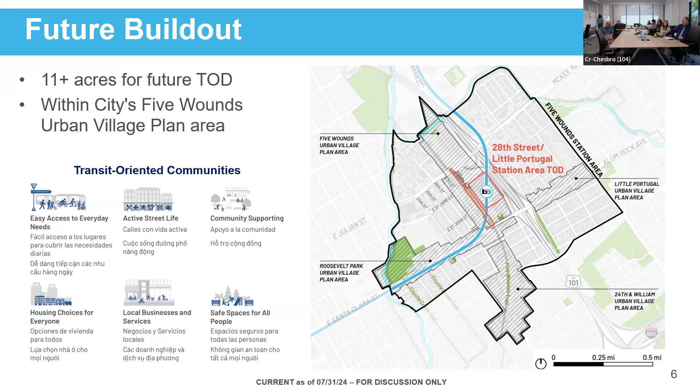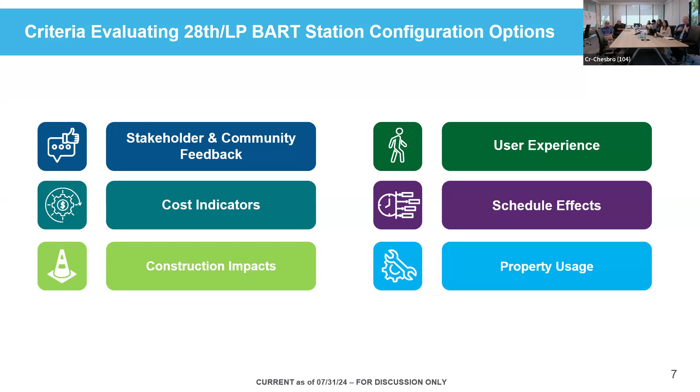So we'll get into some details. These are the things we talked about last week, things we were kind of using to evaluate our options here. These are things we got feedback from the community working group on. Thank you guys for taking the polls, I know those sometimes didn't quite work perfectly with the phone configurations, so we sent them out again. Hopefully you guys have the link, and if you take that again, hopefully we'll get more feedback utilizing the ones sent out in the link to today's meeting.

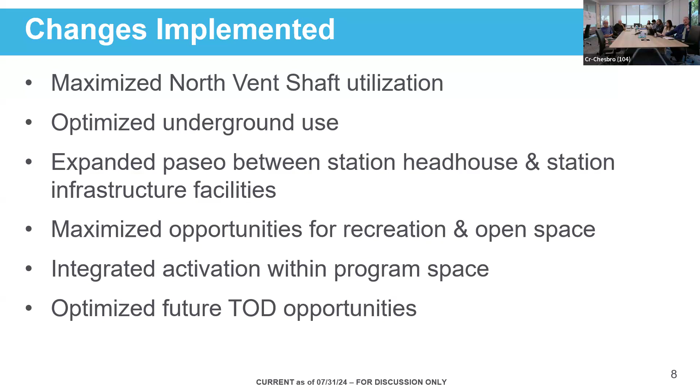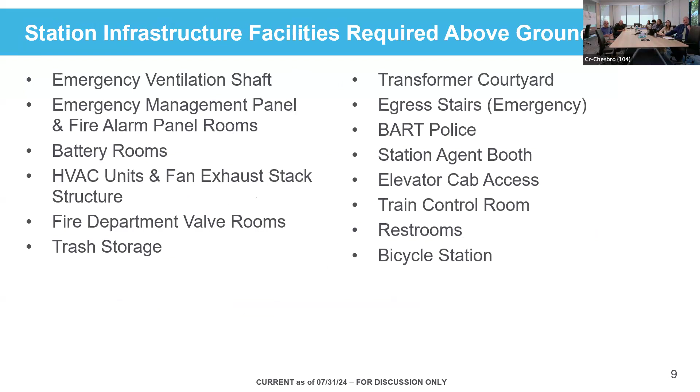And then also looked at optimizing the TOD opportunities around the station. So those are real things that we've done. I've also covered this - these are things that we have to have above grade for the most part. So we don't need to go into all those in detail.

But I just want to show you there are some square footages that we do have to accommodate. So we do still have the 4 options that we want to get more feedback on today, and I'll present those in a little more detail. We've got our underground option, the integrated above and underground, our consolidated, and then the above ground.

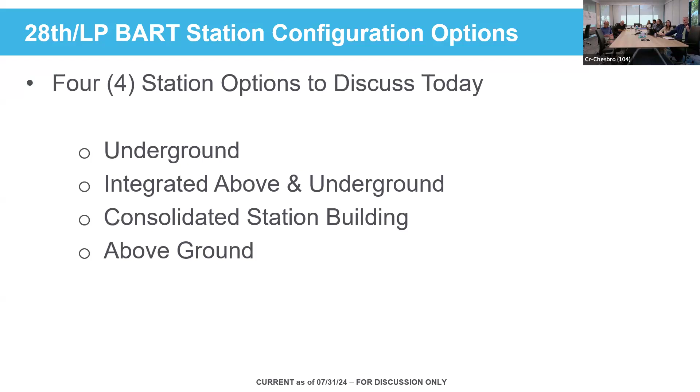These are kind of what the 4 options look like based on the future condition build out. I'll leave it here for a minute so you guys can see what we're talking about. I think there was a comment asking about massing and how large these things are going to look in the future. So these 4 slides show where the church is, where the high school is, where the station plaza will be in orange, some of the neighborhood park across the street that Charlotte mentioned earlier, and then these 4 station options shown really in blue.

Those are the real configurational updates that we wanted to talk about, just the areas in blue. David, you mentioned we should have a bigger picture of the whole area - we'll definitely have that for next week's community meeting. But today we really want to focus on these quadrants.

I will say that those TOD black and white buildings are definitely just concepts at this point. We are not here to talk about what those shapes of those buildings will be, or what.

Sorry, I think we're battling mice.

Yes, okay. So we're not here to talk about what these shapes will be. I don't know what they'll be, but it really comes down to what the footprint will look like. So those are kind of 4 options.

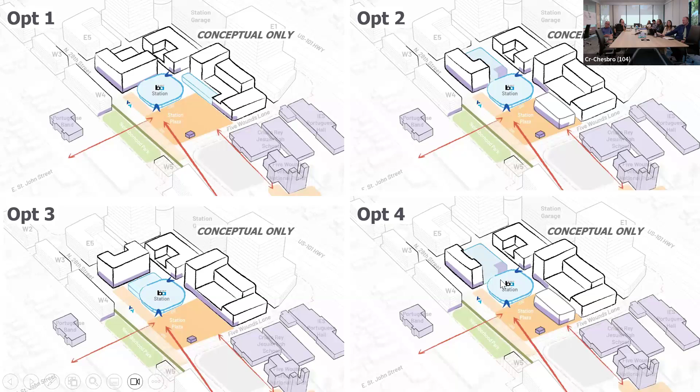Again, the area under evaluation is just where we're talking about for the future TOD site and the station head house that's shown in blue. This is the underground option - you might want to say TOD is transit-oriented development. Thank you, yes, that is transit-oriented development. So that will be ground floor, commercially leasable space.

That could be anything from businesses, retail, food services, or other institutions that could take part in that. It doesn't necessarily have to be something that somebody's selling. And then above that would be mixed use. So that could be housing, it could be office space, and it really depends on how the whole build out will look. So when we say future TOD zones, that's really a wide variety of open space that could happen there.

So this is the first concept we talked about. We added some dimensions to it. We do kind of show where that paseo would be between the two. And then we show that this infrastructure facility is kind of cutting the corner of the plaza out a little bit here. And then we would need to roll back the TOD footprint a little bit in this northeast quadrant. And then we have a pretty large, massive underground facility here.

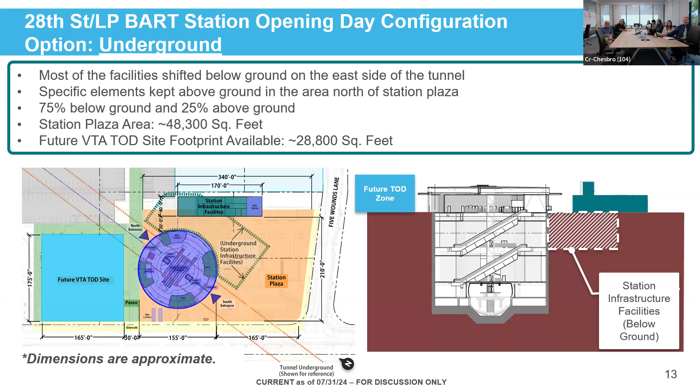The next option, or this just gives you a little bit more detail of that particular option in terms of square footages, offsets, kind of how that site looks. Again, this orange plaza is about an acre. We tried to widen this paseo out. We've got our 28th Street bus stops over in this area. And we've got our future TOD site, and this could be surrounded by a multitude of different things.

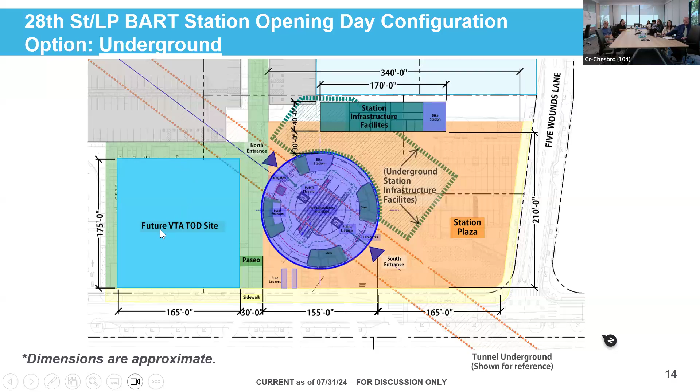And here's a close-up view of that underground option. This would be the future build out, not opening day. So opening day, I think we talked a little bit about that before. That includes the parking lots, that includes the parking garages, but does not have these buildings in white and black.

Okay, so this is the second option. As Erica just mentioned, this is kind of what opening day would be. We've got some surface parking and parking garage. We got a north vent shaft facility over here to the left, and then we've got our facilities here. What this one does is...

combines a lot of above grade facilities with a below grade facility that directly connects to our head house here. You can see it in this hatch where we've got a lot of below grade facilities right adjacent to the head house. This is a pretty efficient design in that we've got a lot of facilities that come out of this head house and tie directly into the station's infrastructure facility. We utilize being below the paseo here, kind of optimize that configuration. And then we allow for about a 90-foot setback here for a future TOD site.

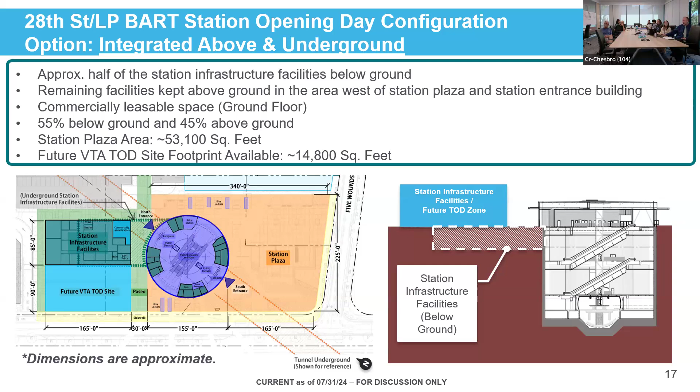Again, here's a little bit more detail of that. This does provide for a pretty large footprint of underground facilities that really run directly from the head house into our infrastructure facility, which is the most feasible in terms of all those cables and wires and mechanical vent structures and things that we've talked about before, that we have to link these two pieces of infrastructure together.

I also note that we've got a pretty large available space for ground floor activation here in this corner. We can reconfigure this in a few different ways. But if you can see that, I don't know if you can point to that. Yeah, right about there. So this probably wraps that whole block, maybe more than 50% or so of ground floor activation by utilizing that corner right there as well.

So I just want to note that is integrated into this program as well, into option 2, or the integrated option. And this is kind of how that future build out would look. Again, the purple spaces here are kind of ground floor activation. We've got our above grade facility.

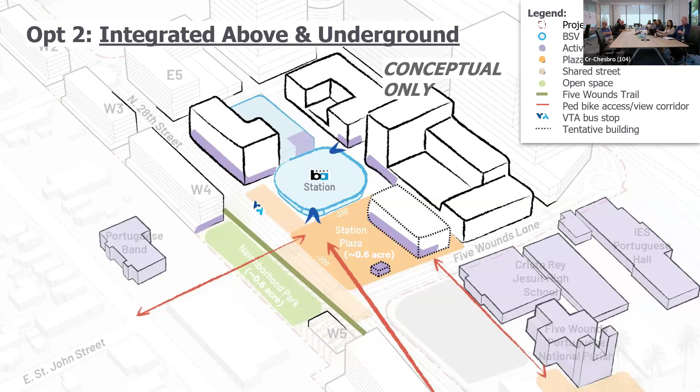This is not something that we need to talk about today or decide on today, but what the project will do is not have a lot of infrastructure in that particular area surrounding that building, so that it could be built out in the future. So I just want to take note for some of you who might see that this little hatched building is a little different here. I do want to note that this plaza is 1 acre. If it just becomes too big and it's underutilized, we're able to maybe talk about putting in another facility here, and that would be way beyond day 1.

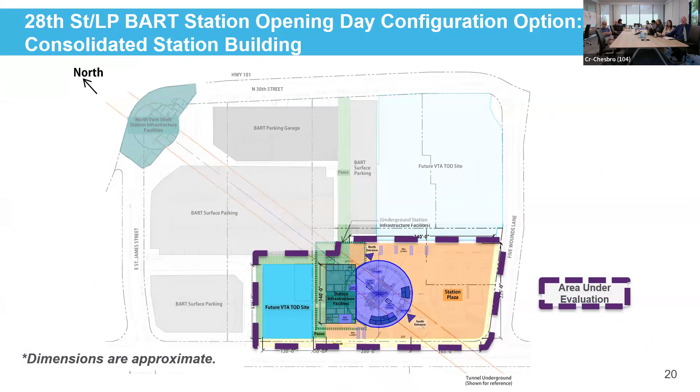Okay, and then the third option, and I mentioned we showed this one last time, and it was a little less clear, and I wanted to make sure it's a little clear to everybody. This one brings the infrastructure facility close to the station and kind of almost overlaps it. I don't know exactly if this is what it would exactly look like. This is just a concept. We'd probably make this a little bit different shaped. But what this does is it integrates those station infrastructure building facilities and the station head house together.

The drawback with this is it may impact the openness of the station itself. So that's one thing to think about. Although we do bring the infrastructure facility back closer to the head house, which is really where it wants to be, we do probably impact maybe a portion of the station, making it a little bit more closed off. In terms of station design, the station architects really like the open concept, and this one closes it off a little bit. So that's one thing to consider.

But it does have the underground facility right adjacent to the purple head house. As much as about 70% of that infrastructure is below, and then we have some elements above. We would also have a paseo, again about a 30-foot offset to a paseo, that would also utilize underground infrastructure below that. And then we would have a future TOD build-out site to the left of that.

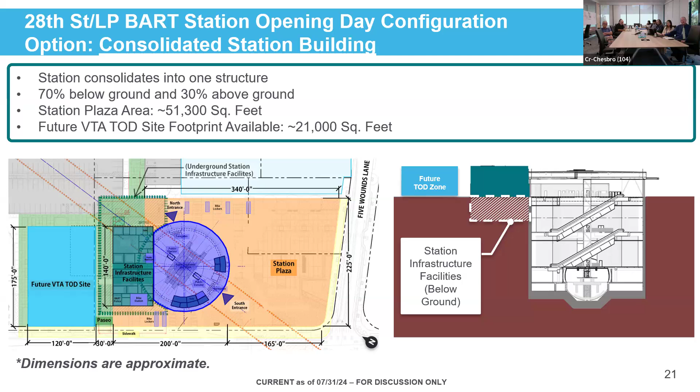So hopefully everybody gets a concept, that third concept. And then the last concept, well, this is another close-up view of that. This one also does not have any integrated station infrastructure commercial space. So there's one thing that we were not able to accommodate when we get things as tight as possible. We lose a little station space, and we lose the ability to build out some commercial leasable space on day one.

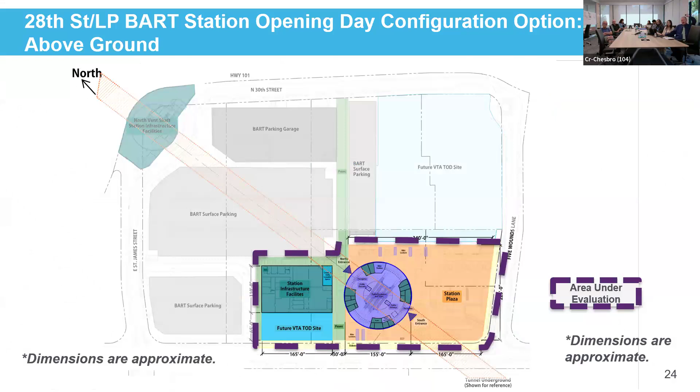Okay, and then the last option is the option that we originally presented several months ago. This has just about everything above grade. It is the least expensive option in terms of build out and construction costs. We do have commercial space in the corner over here. We've got our TOD build out in this area, and then a fairly large wide open station configuration as well. This is the same station configuration that's shown in option one and option two as well.

So those are the main things that I wanted to present to the group today. Hopefully that helps kind of alleviate some of the questions folks may have had in terms of overall site build out, rough order of magnitude on dimensions and things like that.

I do want to get into the details a little bit. The underground option is a little bit more expensive than the other two options presented. Again, it has just about 75% of the infrastructure facilities below grade. The other ones are about 55, 45. You can kind of work your way through those.

The station plaza area remains a little bit over an acre, about 48,000 square feet. So we're right about at an acre, sometimes a little bit more. Then we talk about the integrated commercially leasable space - some have it, some don't. And then the future TOD is roughly the same for the three options, and the above grade portion gets a little bit smaller.

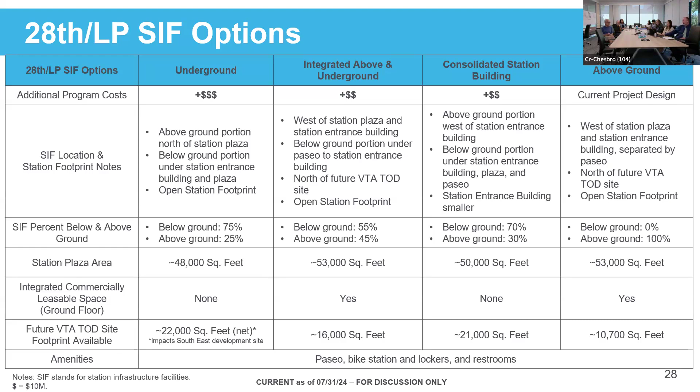So the question is how many commercially available spaces will there be? It really depends on which option we go with. On the day one scenario, depending on which option we go with - I'll just look at the option that has commercially available space on day one, which is this one. We really have one space here. And then we would potentially have some spaces out in the plaza, which would be like kiosk-style spaces. But those wouldn't necessarily be there day one - they may or may not be there day one.

I know that in Milpitas, and I haven't been there since before it opened, but there was supposed to be a space for food trucks.

Yeah, so a way to maybe test the viability of kiosks might be to allow for select approved food trucks, so we don't have a food truck fair.

Yeah, and we've kind of thought about that, and this northern or eastern portion of the site could be used for food truck entrance and exits, and we would be able to accommodate that in a few different areas. So that's definitely something we could consider.

Right, and then also, in Milpitas, sometimes it's very difficult to actually lease these spaces out. In terms of a food truck or a temporary kiosk, it's a lot of times easier than having a full build out like this is.

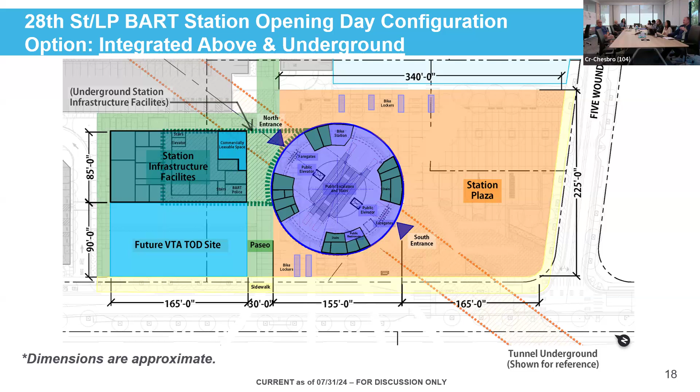So what are the heights? For instance, on the future TOD site, what's the height on that dashed building? Right now they could vary anywhere between 3 and 6 floors, Christina - all these buildings kind of have multiple different floor scenarios depending on what square footage you guys need. Is that right? Yeah, and it's a concept that's distributed across the whole entire 11 acres.

That's been going on through the design development framework process, where the goal, taking a bunch of different considerations of the overall site, is that the heights are lower near the church and school and higher towards the freeway and the farther side of the site on the north side. If you can see the background here, this far building concept is maybe 10 stories tall. This E5 here looks like about 5 or 6 stories, and these are shorter - that could be the residential units. So that's the way this thing would be configured, and as Christina mentioned, they get shorter as we get closer to the station.

I just wanted to add on to what Greg was talking about earlier. For the future TOD build out, the goal is that VTA's TOD real estate group will have a simultaneous RFP process as the station is starting to come live. So as soon as we're able to get site control back from the contractor, we can put out an RFP for either a single developer or several developers who would build out the site. With the aim that once there is site control, they would already be doing community outreach, design development or design proposals, and be able to start taking action as soon as VTA gets site control back.

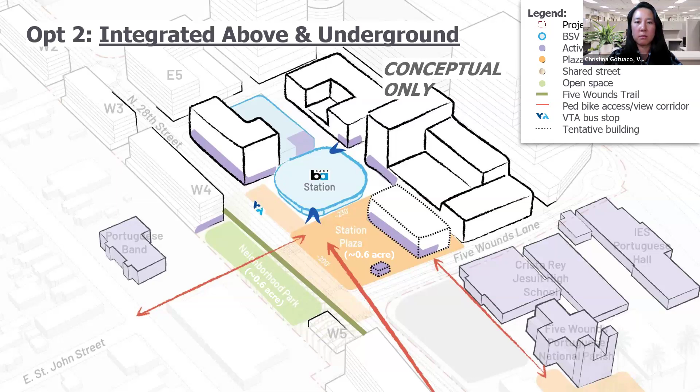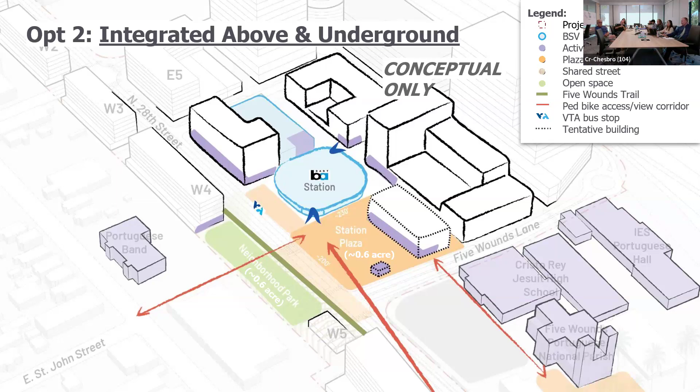Can I ask another question? Of course. The brown, or tan, on the images—what is that? Is that stone, is that concrete, or what? I'm sorry, the design review committee is doing those kinds of considerations.

Okay, I know that, but that's why I brought this forward—because whatever that is, if food trucks or any vehicles are going to be parking on there, they leak, so we need to require owners to diaper their vehicles. Well, we're not going to— it depends. Correct, it was a joke, Dan.

If you can see the background here, there's a lot of different site features—furniture, plaza features, trees—and there's a paving scenario that runs from the corner here into this area, with some decorative paving and all this business. So there's a lot of other details we'll be working out through the design review committee. Right, I'm just throwing it out there.

I don't know if there's talk of maybe having an area here for food trucks, but I don't think a food truck's going to be out here in the middle of the plaza, right? Oh, you'd be surprised what they do on their own around here. Well, we do have a BART police facility directly here, and there won't be people driving out on it. It could potentially be drivable with some removable bollards, but it's definitely not going to be a mountable curb where someone can go out there and drive around.

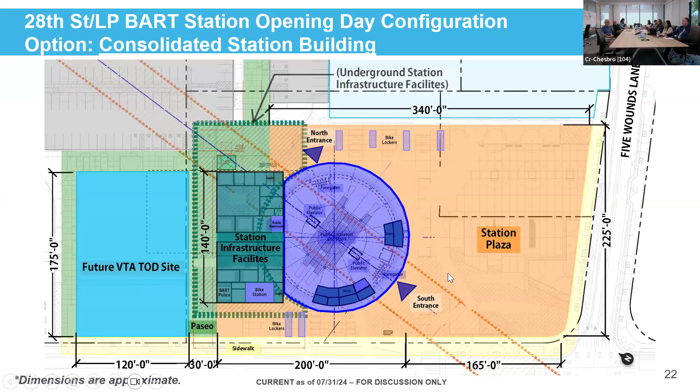Are there any online folks who have questions or comments on the options presented?

The next steps we want to talk about are retail kiosks, community activation within the plaza area, and then pedestrian routing and streetscape. Again, some of that will be part of the design review committee, and some will be opened up to the community working group as well. We do plan to share this with the VTA board this month at the oversight committee.

Shouldn't the City of San Jose PRNS - that's Parks, Recreation, and Neighborhood Services - be involved right now, or have already been involved in talks of activating this plaza, much like they do with Cesar Chavez Plaza downtown? This is a big opportunity. At its largest it's an acre, which is a good sized piece of land. Shouldn't the city's Parks and Rec Department be involved here?

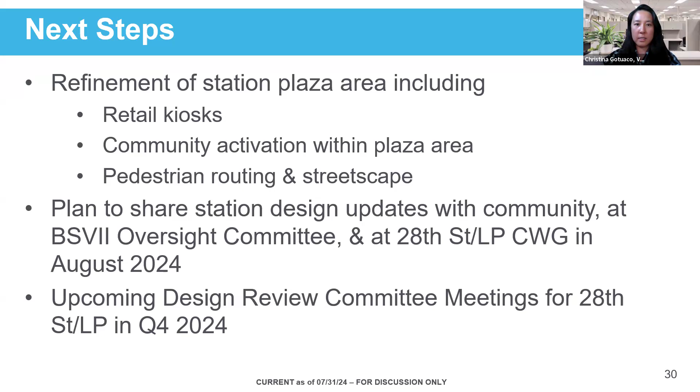VTA is in talks with the PRNS. We actually had a meeting with them today on some topics, like there are actually three proposed open spaces - a gateway park near Santa Clara, this neighborhood park across from the station entrance, and another smaller one, plus the station plaza. So VTA is actively talking with them.

And that's this park here you're talking about as well, Christina? Yeah, so that one is the station plaza, and then there's another little sliver closer to Santa Clara - I think down here. These three would be depicted as flexible to become either publicly owned or privately owned open spaces.

Charla, did you have something to add? Yeah, David, I believe you're the one who asked about what's going to happen in the plaza and whether the city is involved. We met internally with Nancy Klein and the Office of Cultural Affairs - I believe it's Michael Ogilvie. Michael and Nancy are very much aware of the potential things that could happen here.

To answer your question, it's on our radar, but we think we'll get more involved in that conversation when we talk about activation of the plaza - what kind of activities are going to happen there - and then we'll have a conversation with VTA and the BART team when that moment arrives. But we're very much aware that this is a public space and what happens there is something the city should really think about.

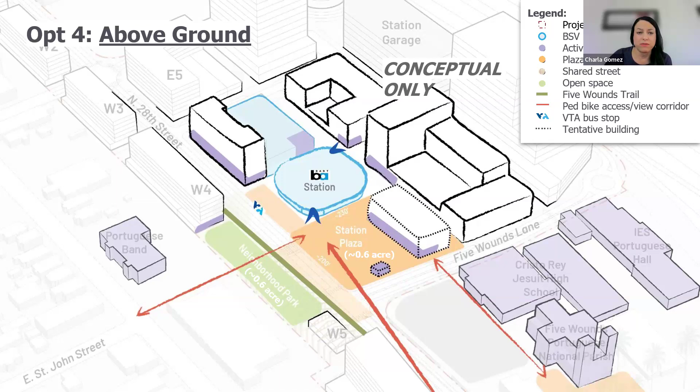I believe what I'm hearing from the BART team is that there will be an opportunity to have that nuanced discussion, but to answer your question, this is something we're definitely interested in addressing. Nancy brought up in the last internal meeting that we need some water and electricity infrastructure. Those comments were formally submitted to the BART team. We need some basic level of utility connections, and I think that comment went formally into the design development package. Anyways, you get the point that we're involved.

Right now there's a current design that has a very large trellis that comes across, kind of a wooden trellis with some vegetation on it. There are a lot of different options we can talk about for the station. The reason I'm talking about sunshades is because you can put them in, tear them out, and build over.

You said we're not putting trees because we may have underground facilities, right? Well, that's if we pick the underground option. Right, so if we pick that one, we can't have trees above it. If we don't pick that one and keep everything over in this area, we can have larger trees in the plaza. And that's my point: if we go underground with no trees, let's put sunshades. That's right, do that too.

So yeah, sunshades, that's the next step, to talk through that. We do have some options we've looked at as a group. We have certain things that need to be in the station, like stormwater management, swales, and things like that. We have to have a certain number of square footage out there for that, and we've got that laid out. We also have to have emergency response areas, bike lockers, and certain other required things, and then a lot of space for other uses.

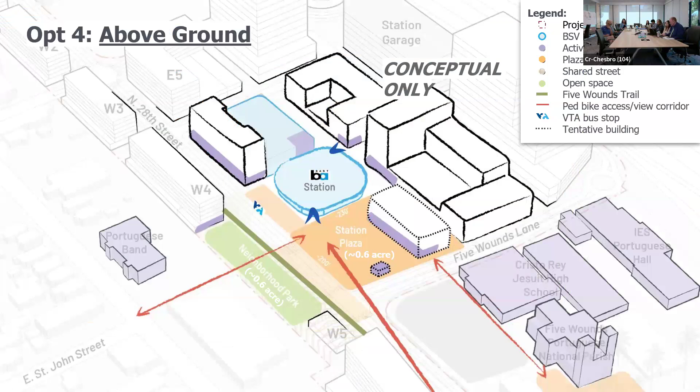Through the design review committee process, looking at the aesthetics, we'll be evaluating the plaza and the layout and what happens where. We're looking at the above ground configuration and how it varies, and we've postponed that process until after we land here. We'll be meeting with the design review committee members, Michael Overby from the city is one of those, as is David and some others here. Then we have a larger public community engagement related to that afterward, so there will be opportunity for everyone, regardless of if you're on the design review committee, to engage in this. I just want to make sure everyone's aware.

So whatever we build out there is gonna be wide open. Hopefully it's built, and not just because I'm an iron worker, but hopefully it's built out of steel because it won't rot, epoxy coated iron, I don't care.

You'd be surprised how robust the BART criteria are. We essentially have to design this to the equivalency of a hospital or a school. It's got a seismic importance factor above and beyond the building we're in today.

If anything were to happen, you want to be near a BART station because that's probably not something that's going to fall down. Yeah, no, I totally agree. And we do have small businesses that can actually do that steel work. They're the ones, the one I'm thinking of is the one who did the Cesar Chavez Memorial at San Jose State. They're right here on 10th Street.

Okay, so those are the options. Is there any other questions on the call from anybody?

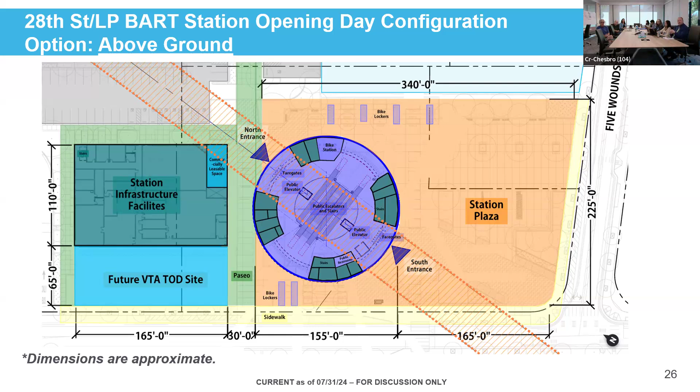Please make sure you guys take those survey questions that are posted. We can bring up the QR code once again. They will close down tonight. There's only about 5 or 6 or 8 questions. Take a look at them.

There is one question asking which option do you think is the most beneficial to the community? What's your preference? I have mentioned before, if we do move forward with these underground scenarios, the costs do go up for that. And when the costs go up for that, we have to offset it with some other things. So we want to make sure that we understand what's most important for you, in terms of the look and feel of the station inside versus the look and feel of the station outside versus some of these plaza amenities that we may have to look at trying to save some money to get a better design for an underground scenario.

So those are some of the things we want to get your feedback on. And I'm not saying that has to happen. I just want to know what the community feels is the most important part. And I think we heard from the group that user experience is one, and that's the final build out condition being a top priority. So make sure that we focus on that.

Also want to note that these poll questions are a little different from last week's as well. We've added a few others. Monica's also placed it in the chat for folks who are online. And I did also email it out yesterday. So if you have a chance to fill out the survey today, we'll definitely factor that in advance of our meeting, our community meeting next week too.

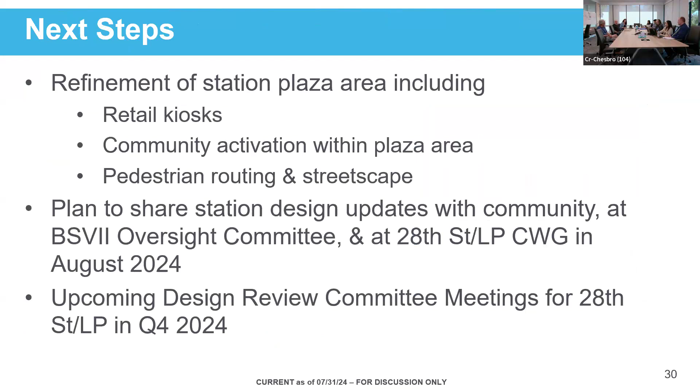Okay, all right. No, we appreciate this quick meeting. It answered a lot of questions and thanks a lot. Yeah, a lot of clarification. Okay, that helped. Awesome, good. Thanks again for being here, everybody.